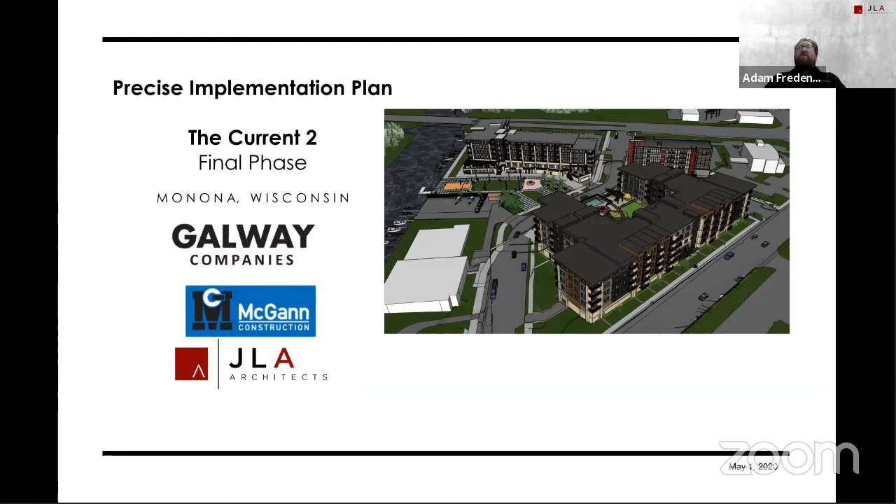Aaron and Steve are with us today, and they'll speak after I get through some of these exterior images. The last time we came before the Plan Commission for an informational presentation on January 27th, there was some general concern regarding the articulation of the Bridge Road elevation.

We feel considerable improvements were attained with proportional refinements, as well as the addition of 5 units on the first floor, or upper level parking. This is on the same level as the private parking level, which allows us to add fenestration and balconies where possible.

Some of the other changes from last time include the 2-story glass along with the vertical elevator, which is now expressed proud of the building front as opposed to having the spandrel materials cross in front of it. And we widened out these metal panel bays to get portions looking a little more comfortable. I think the material distribution on the front is now consistently applied throughout.

So the materials are similar to the Phase 1 project. The dark metal panel is from Millennium Forms in Elkhorn, the Summit Brick is St. Charles, sort of cream city color. The Monterey taupe panel would be the flat panels on the building, which have those reveal joints similar to Phase 1. The dark gray and the wood tone would be lap siding applications, and the wood tone is also on the soffit, similar to Phase 1.

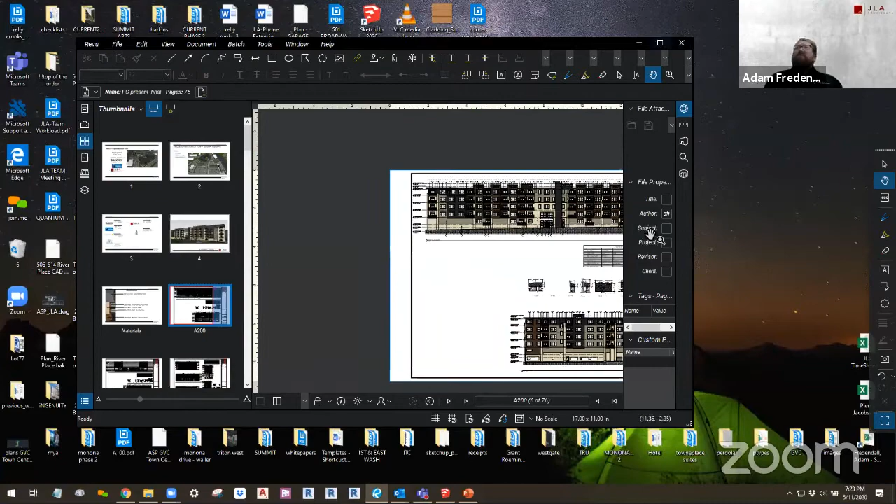Let's zoom in a little bit here, bear with me for a second. So on the buildings, you can see we've got lap siding for the wood tone and the dark gray, that's the Monterey taupe, and of course the brick piers that come up. The brick is now at the wainscot height of the second level parking, allowing materials to transition a little more seamlessly. Back to that over here.

Here you have the Bridge Road elevation and the north side elevation, and you can see some of these openings on the lowest level are just wall openings. The lower level parking would not be heated and would be free to access for public parking.

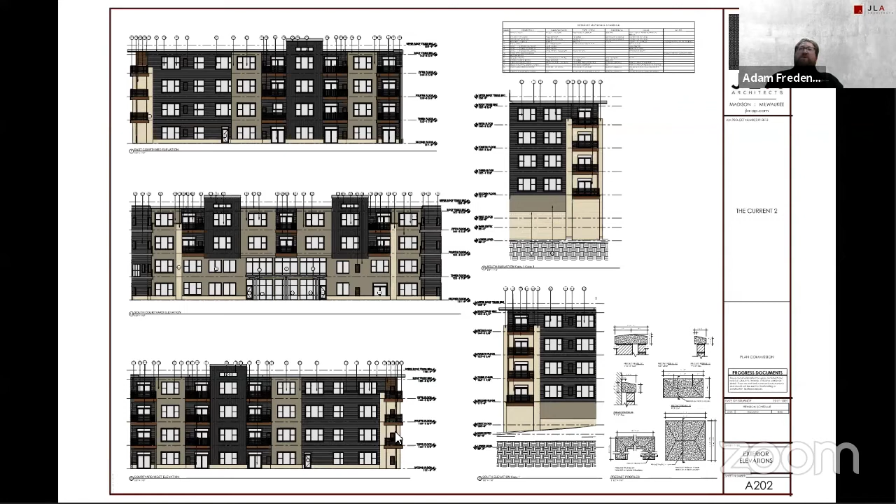Here you have the park side elevation as well as the south, and the miscellaneous ones in between. This is where the club room is on the courtyard, side courtyard wall. Got brick coming up to a wainscot height there, and then on the corners.

Jumping into some of these perspectives, now a lot of these images a lot of you have seen before. I realize there's some new people, but one of the organizing concepts for this master plan a few years back

was to really set up the importance of Grand Crossing Park, really create a backdrop for a fantastic public space for Monona. One of those things that really helped reinforce that is having the green roof of this multifamily building be on axis with the park, albeit a hockey stick type axis, but it really offers some dramatic connections that are multi-leveled and makes for a very dynamic space as you move through Inland Way and the Grand Crossing Park.

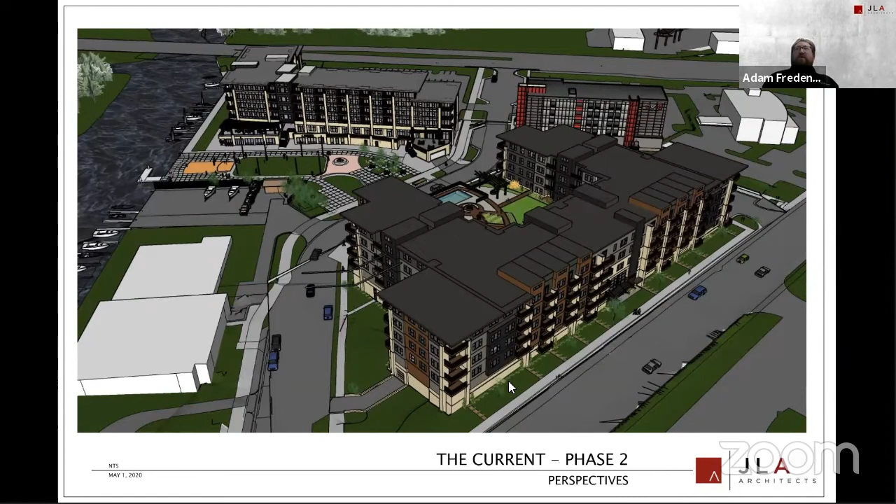This shot is outside of the club room on phase 1, looking over where the ice rink was and up to that green roof. So front and center on the building, this of course is the pool right behind here.

This isn't finalized by any means yet. The concept is to have something artistic there to really create a nice looking wall facing the park. So these things could be backlit and have a really nice effect. I think there's going to be a lot of discussion that happens still on what exactly that ends up being.

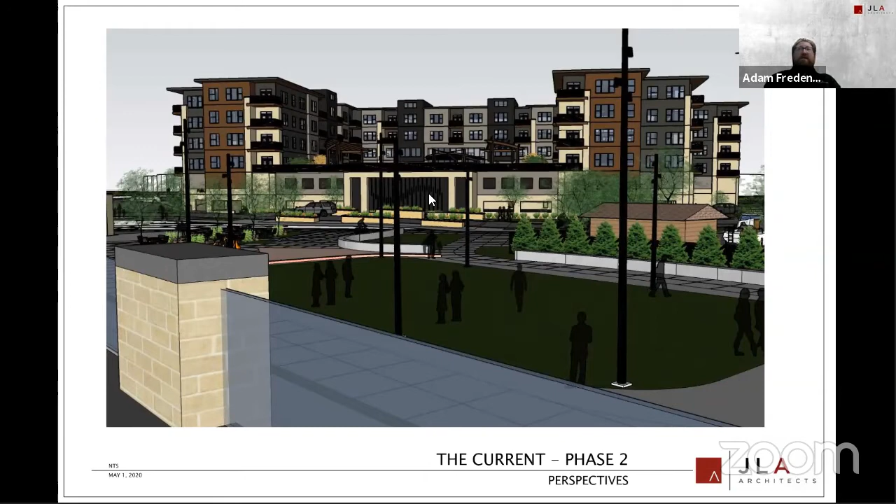This is just from the top of the stairs outside of True and Forage. Yeah, I know the railings look really dark in the renderings. They would be the same cable railings that we have in this phase, so they do become a lot more transparent in real life.

This would be a look as you turn onto Inland Way from Broadway, and then coming up the street behind Monona Bank, in between building and heading down towards the park.

The shot a little further back of Bridge Road. You can kind of see the material transition and coming around the building with the different colors and textures.

This would be on the north side of the building, coming up in the way across from the yacht club. This entrance here is for refuse collection. We really wanted to improve that situation from phase one, so it was critical that we get this right with how the service providers want to access and collect from the building.

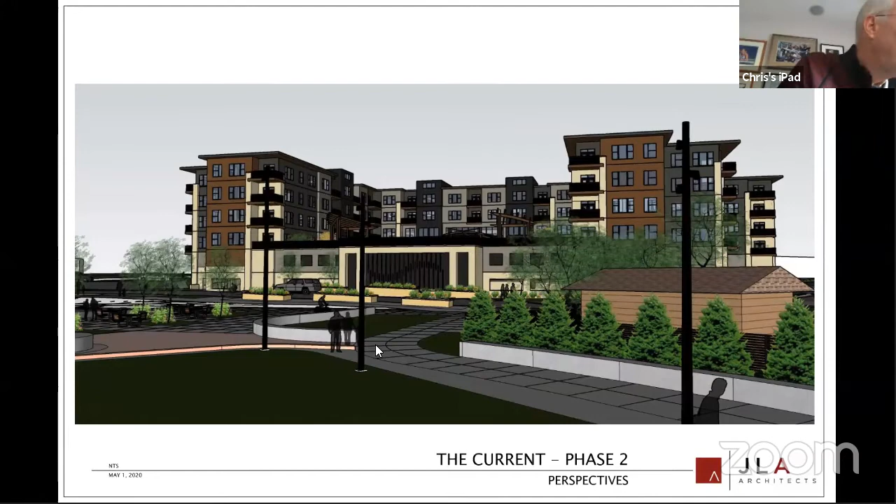Another shot from the park. And of course, from another aerial perspective, you can see the building is pretty maxed out on this site.

If you guys recall, the site was a little bit bigger before. Additional street parking was designed in around the periphery. We squeezed the site down a little bit, but everything seems to work out well.

One more shot, seeing the pool up a little closer.

And of course, the metal panel form on here likely has some signage on it. We're pulling some of the, potentially some of the wood structures through this project at select locations as well.

And the shot looking out from a balcony, probably 4th floor, over the park into the river.

So landscaping wise, like I said, the green roof is very generous. It's a nice large space, but we did still want to have grass area for people to hang out, play, and just a great space like a yard that wouldn't otherwise be available.

So heavier landscaping around the perimeter to give some sense of privacy to the people that have walkouts right onto that roof surface. We've got some central mulch and flowers, landscaping in the middle around the intersections of some walking paths. So these are just different paving patterns.

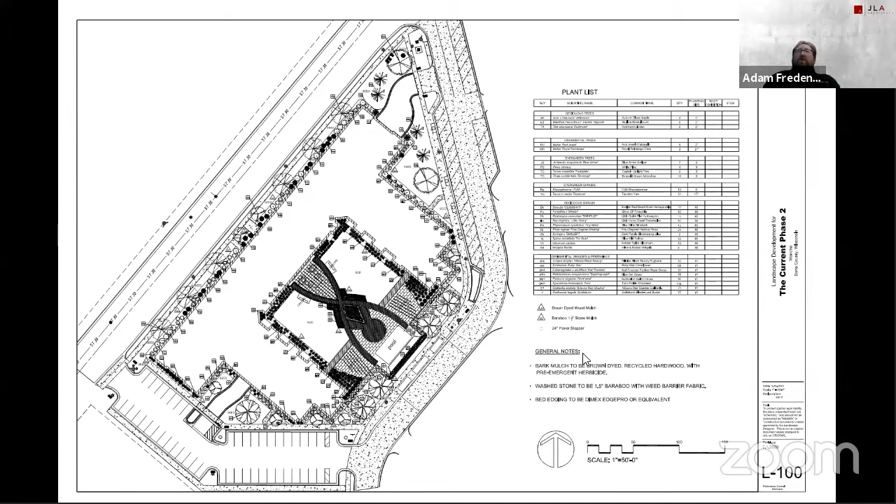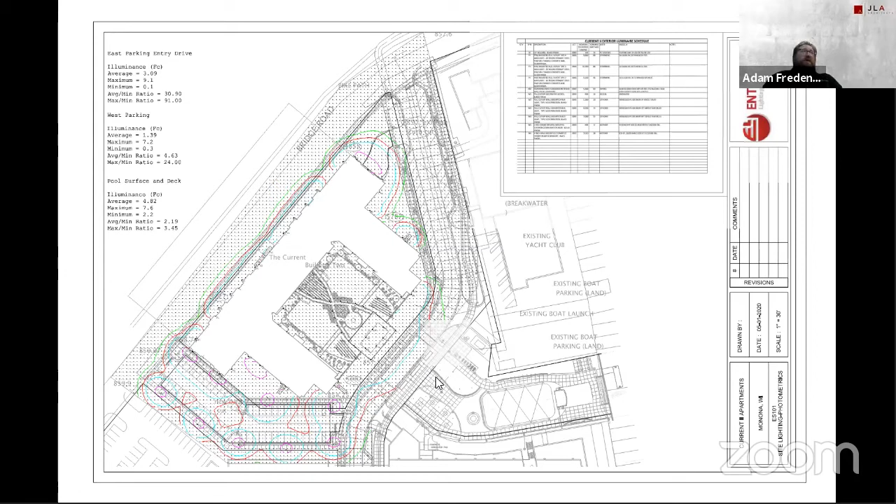We've talked to the next few items. Steve? What's that? Okay. Adam, can you actually go back to, I think it's slide 4?

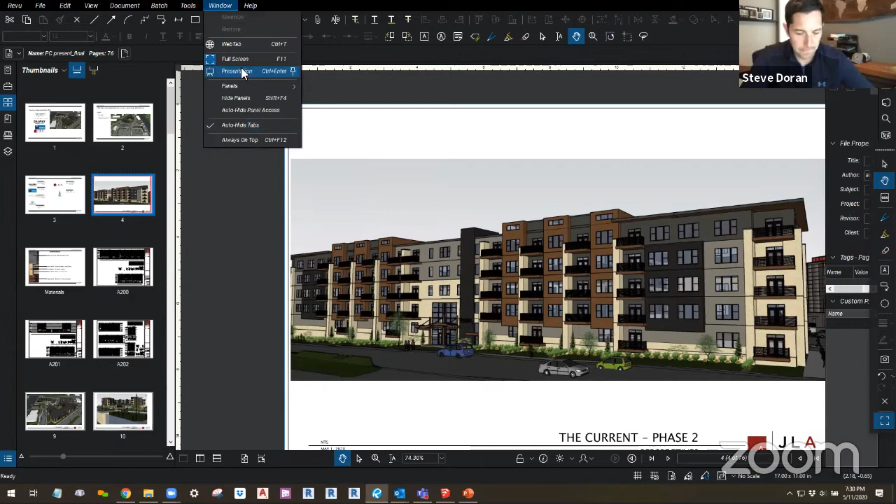I just wanted to talk a little bit about the Bridge Road elevation, something we've discussed a lot internally. This is one of many iterations we looked at. As some of you may know, we submitted for Plan Commission and planned to come a couple weeks ago, and we just couldn't get comfortable with what we had proposed on Bridge Road.

We've been trying very hard to be cognizant about bringing the Bridge Road elevation down to a manageable level so the building doesn't feel too massive along Bridge Road, even though it is a very big building. So one of the things we explored pretty extensively was bringing 5 walk-up units in along Bridge Road. Actually the plan set we submitted a couple weeks ago had those.

The issue we ran into is that the first floor of the building isn't level with the sidewalk. So in order to bring walkouts there, we would have had to bring a stairwell out that then shifted to the side, which essentially made it look like more of a wall. The stairwell out of the unit wouldn't come straight out to the sidewalk like a traditional walk-up townhouse feel, because there's a utility easement there that would prevent us from doing so.

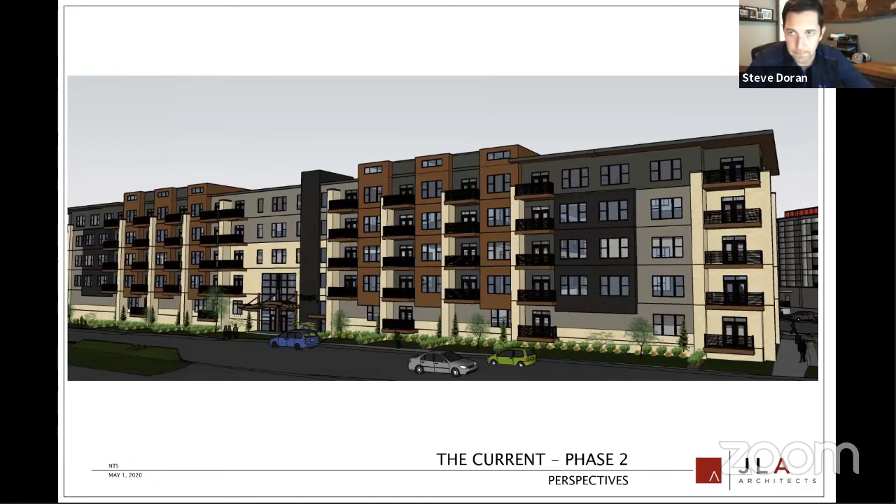So we were pretty disappointed about that. We wanted to do walk-ups there, but we were able to come up with this option, which I think is still really good, and it brings that first floor level down to a more feasible option. Those are actually 5 units you enter from the top private parking garage — there's no internal corridor. You enter into those units through a vestibule, and they're smaller one-bedroom units with more of an individual feeling. So I just wanted to talk about Bridge Road.

I know it was definitely a point of contention at the last Plan Commission meeting, and there was interest from all Plan Commission members to bring down the scale of this. So we've tried to work very hard on that.

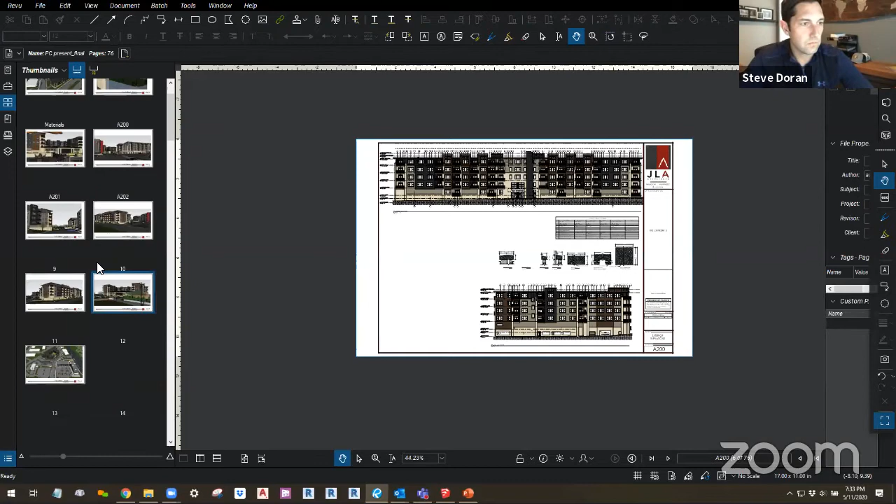Is that okay? Yeah, so a couple other things — one thing before I even get to this point, I'm reading, or we read in some of the staff comments today about the parking, and I just want to touch on that because it relates to our agreement with CDA.

We are currently showing 283 parking stalls. I think the plan set had a misprint and said 284, but the project is currently showing 283 stalls.

As the project is proposed right now, we would need 227 stalls, which leaves 56 stalls for the public. Now, in our agreement with CDA, we have to provide 58 stalls. So I guess what we're looking for tonight is approval to maybe work with staff on that. We will provide the 58 public stalls in addition to what our project is required to have per code.

That may involve us removing a unit or two from our project to make sure we meet code, plus provide 58 stalls designated for the CDA, per our agreement with them. We have a little bit of flexibility in our plan set to maybe add a stall or two, so we may not have to remove 2 units, but as of right now it's looking like we may have to remove 1 unit, potentially 2 for sure. It's our intention to meet that commitment with CDA and provide at least 58 stalls above what our project is required to have per code.

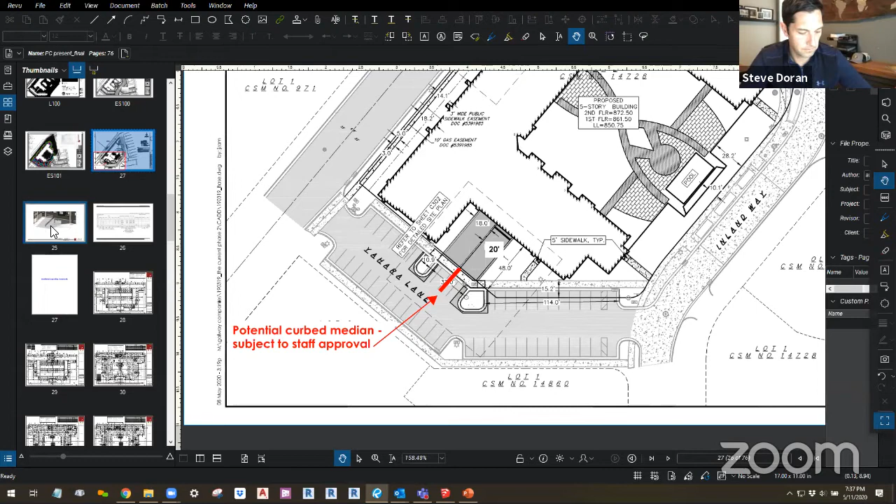I think the last thing I had before we open it up for comments, this is what Adam put together to show what it looked like off Yahara Lane.

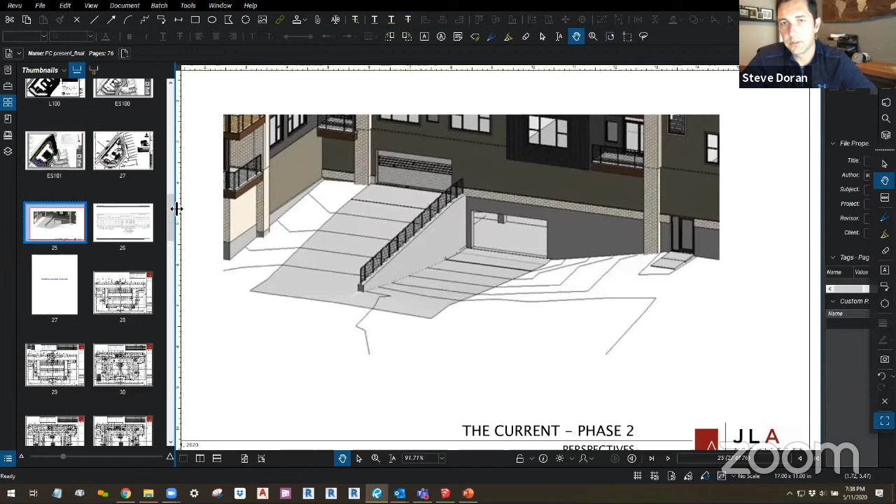The last comment I had is, I know we certainly did solar on our phase 1 project. We've got a study coming up right now to determine what that first year looked like, and we're exploring it for this project. We are going to make the building solar ready, but have not committed to actually putting the panels on until we see what the results are from at least one solid year of operating history in phase 1.

So I think that's all I had. I'm sure there'll be several questions, and we're happy to and excited to answer them.

Okay, but otherwise, Aaron, is there anything you want to add? No, I think you guys covered pretty much everything that I was kind of thinking about touching on.

We've vetted these entries into the building at every which angle and every grade possible, and I think where we're at now is probably the most efficient way to accomplish both things. But there's still plenty to work through as far as details with that entry and exit. We understand that, and we'll continue to work for something that works at that location.

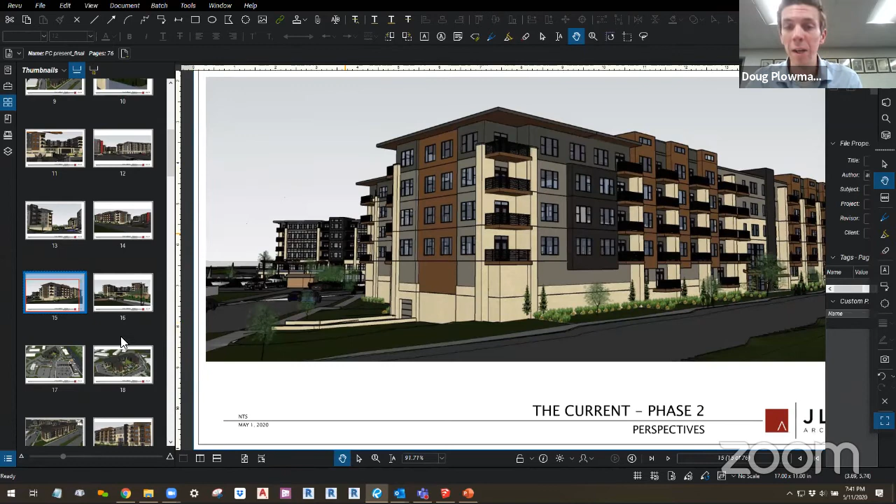In terms of the architecture, I think calling out the two corners there, sort of at Bridge Road, both Yahara Lane and Inland Way, there are still, and I think this builds on the discussion from the January meeting, still some blank wall space there. I don't know in terms of the renderings and how the landscaping plays with that, but on the perspective views, it did still seem to be there and worth calling out.

I was encouraged to hear from Adam tonight about the screening wall covering the pool equipment. I know there was discussion about that at the January meeting, but some more discussion and design concepts for that would be good.

The site design in terms of lot coverage, I think it's important to call out those numbers - the percentage at grade, given the site constraints and massing of the building, comes up to about 11,500 square feet, around 13%. But adding in the green roof takes it to 35%, which is over the 30% requirement for code.

I'd be interested to hear more about the green roof specifically and the design for those, and encouraged to hear about the solar as well, the solar ready.

The applicant gave some more information about the setbacks and specifically the walk-up units, the easements there and the challenges that brings. I think it addressed in some ways the visual along Bridge Road that was the feedback from the January meeting, looking to get a little bit more interaction at street level, particularly for pedestrians.

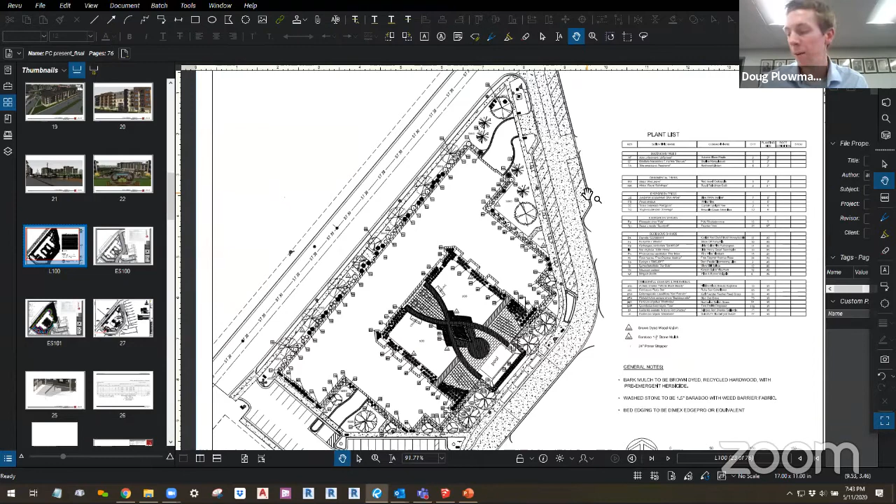Moving through vehicle access, the parking, most of that has been laid out. We have Chair Stolper here from the CDA for that portion, but the applicant outlined the 58 public stalls. You also see discussion in the review letter from Strand about the parking and a couple spaces being taken out on Yahara Lane - just to think about that as well.

The pedestrian and bike access - I think it was 158 bike stalls, with 3 different interior bike parking space areas. Speaking with Adam, he mentioned there's also a plan to put as many racks as possible at grade, on the exterior of the building, both for the park side - it may well be both public and residents using it - same as phase 1, as many bike parking at grade as possible. That seems to be the plan.

Lighting was outlined pretty well by Strand - some comments about continuity with the rest of the master plan, making sure the materials and product are similar, and a couple things to figure out about private versus public location of those lights, and maybe a bit of light trespass as well.

Signage - this was brought up again in the January meeting about really delineating the access and ramps, making sure the public and private ramps are specifically called out, so the public knows firstly where to enter with their vehicle, but also the right doors and access to return to the vehicle, maybe after having been at the park. Making sure that's clear, and having some unified signage would be a good recommendation.

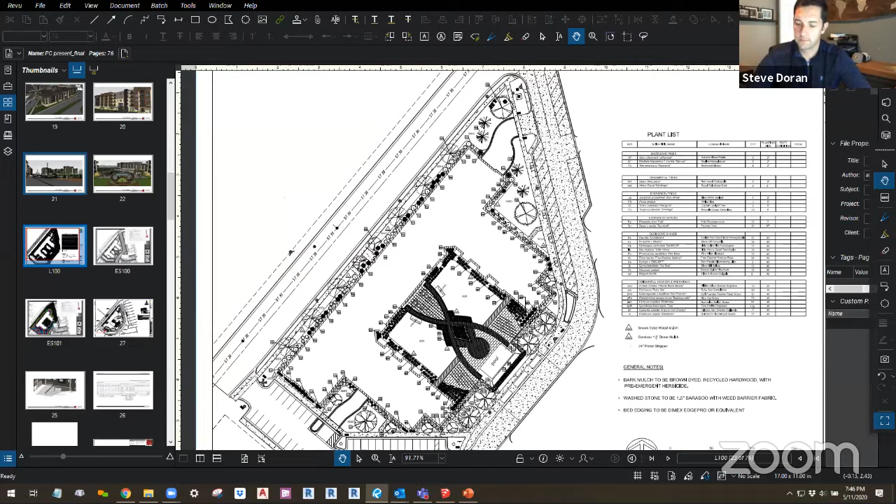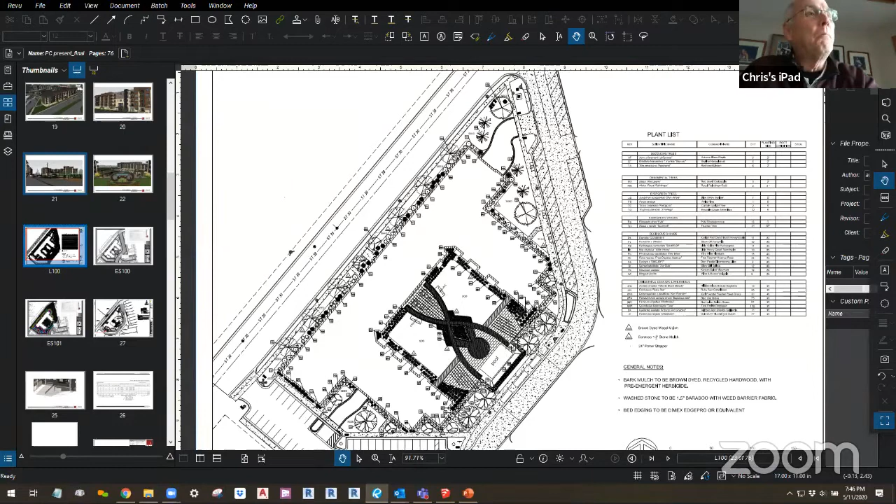Okay, I'm not going to be able to see the people, am I? First thing I'd like to say is I love what you've done with the Bridge Road facade. What was before very monotone is really interesting now. I love having that 2-story glass entrance, and I like having some units on Bridge Road facing there - there'll be a little human element. I think you've done a great job on Bridge Road. It's still, as you said Steve, a massive building, and it is, but you've really created a much better facade, and I'm very happy with Bridge Road.

I understand, Doug, about landscaping, and they do - when we look at the landscape plan, they've got a couple trees on that corner.

But I think you've really solved the biggest issue I had with the entire plan set.

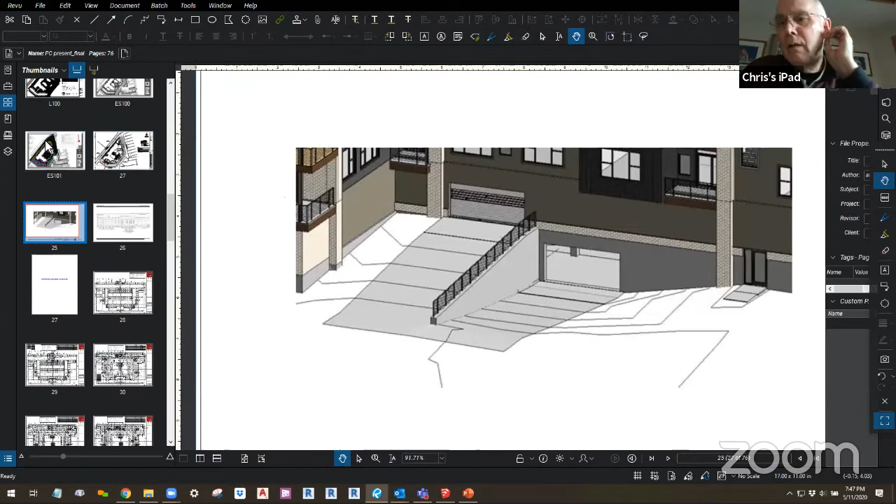I do have a question for the underground parking coming in the south. Would that be the southwest corner of the building, the south entrance? Thank you. That's going to be twice as wide now with your proposed change, right? You'll have 2 lanes in and out of your private area, plus 2 lanes in and out of the public area, correct? Right, that'll be 2 20-foot wide entrances. So we'll lose a few more stalls in there. Correct, just something we'll have to look at in the final tally.

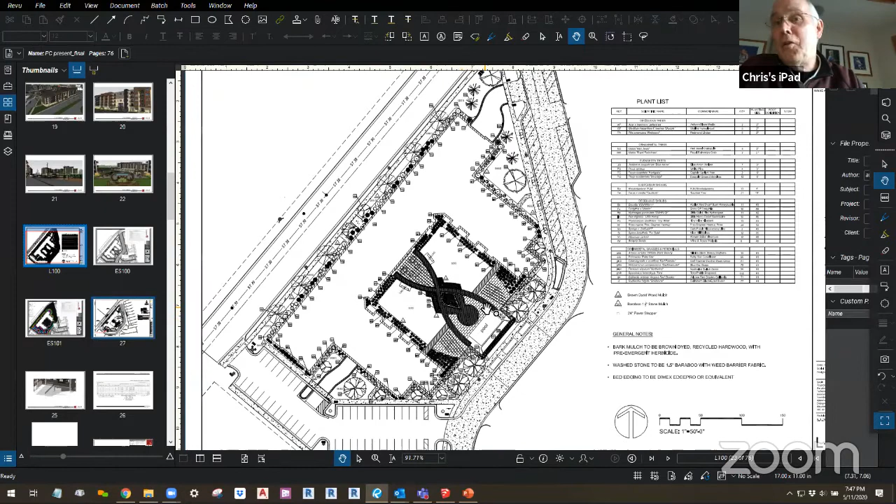On the landscaping, we generally have this issue with underground parking, where sometimes there isn't enough room. I think this is one of the first times in Monona I can remember we have 2 levels of underground parking, and I think you've put a lot of landscaping in there. I'm pretty happy with it. When you have 2 layers of underground parking with so little green space, it's hard to get the points required, but I think you've done a pretty good job of putting what you can in there without overdoing it. So for me, I'm very happy with the landscape. I wish Rob were here to comment on it, because my eyes are pretty old for looking at all those tables on the size plans we have. But overall, for the points and the saturation, I like the landscape. I like the way it's turned out.

I have, if I could switch gears, a number of questions that will go to you, Josh. You're on here, yes? Yep. Okay, so let me go through your engineering report first.

Item 3, we talk about the permeable pavement areas, and the applicant's going to be going through those. I believe the city's intent is to put permeable back in where we don't have drive lanes. Obviously, where they're putting in their driveway, we would leave regular asphalt there. But it's really critical for the applicant and their site contractor to be aware of what's below there. There's open graded base course and drain tile, and if they were to get into that and contaminate it, it would contaminate that entire bed on that side. You know, Josh, what I'm talking about. Yes. So, somehow remember that when they have their pre-construction meeting with the site contractor, you can really address that area. I'm not sure if they're even proposing on replacing that asphalt that's there.

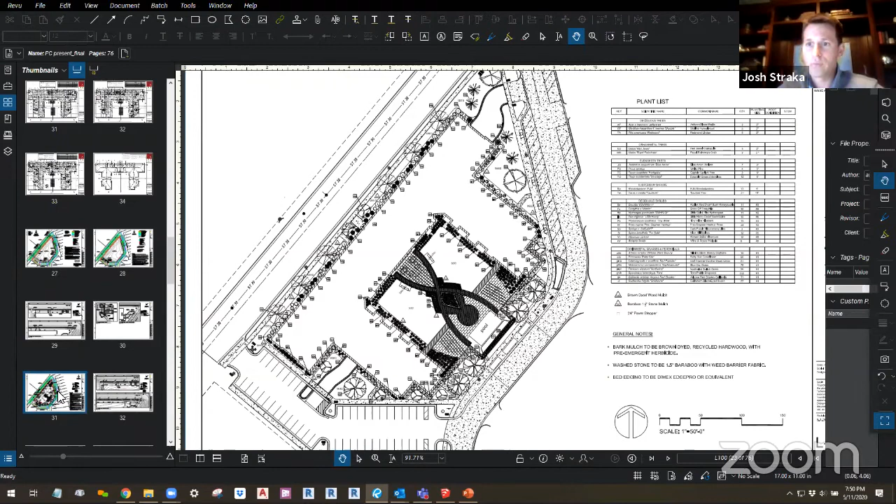And then one of your comments was not to saw the curb head off. Can I ask why, and replace the curb instead? It's just, if it's new construction, and they're tearing all that sidewalk out and putting a new ramp in there, we just thought it'd all be clean. I agree with all that, except that this is right over the permeable bed, and it was all poured integral. If they saw the head off, that will probably react with the rest of the curb better than completely removing it and putting a new piece in.

And so if they're not going to change the grade on that asphalt, we have no patches on that asphalt right there either. We've got a good tight edge that we already have, because I doubt we'd replace the driveway with permeable. I would hope we wouldn't. We'd leave that regular asphalt.

So all I'm saying is to keep that open for an option. If they saw that head and the grades will work, I agree with the sidewalk. They've got to take the sidewalk down and back, and I think you illustrated how far they need to do it. But that still keeps them out of our pavement, and I think every little bit we can keep them out of our pavement, that's going to be better for us. And again, it'll save them a little money, so that might be a win-win. Makes sense.

One question on your item number 8 talks about the middle entrance to the development off of Inland Way, and that it may be too steep for ADA, but they have other entrances. Does every entrance have to be ADA accessible, or do they just have to have so many? Because we have a lot of grade issues here with the way this building's being sited. I think somebody really put their thinking cap on between our last meeting and this one, and they've come up with some great solutions.

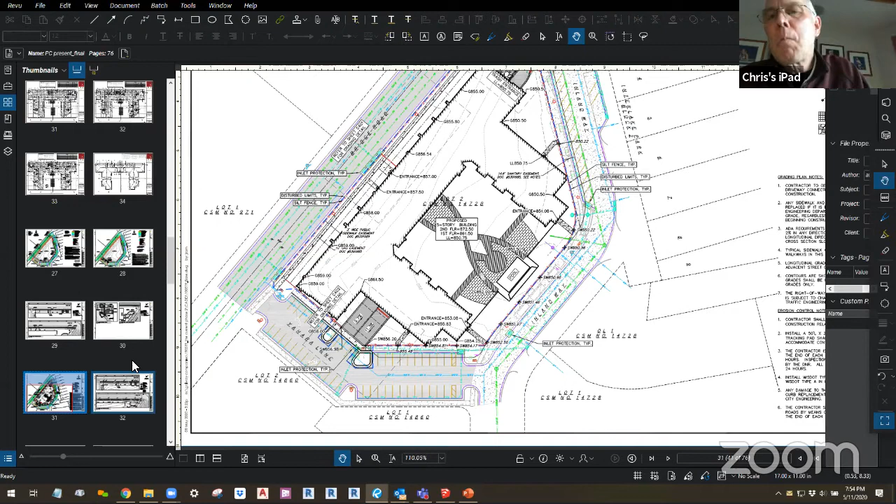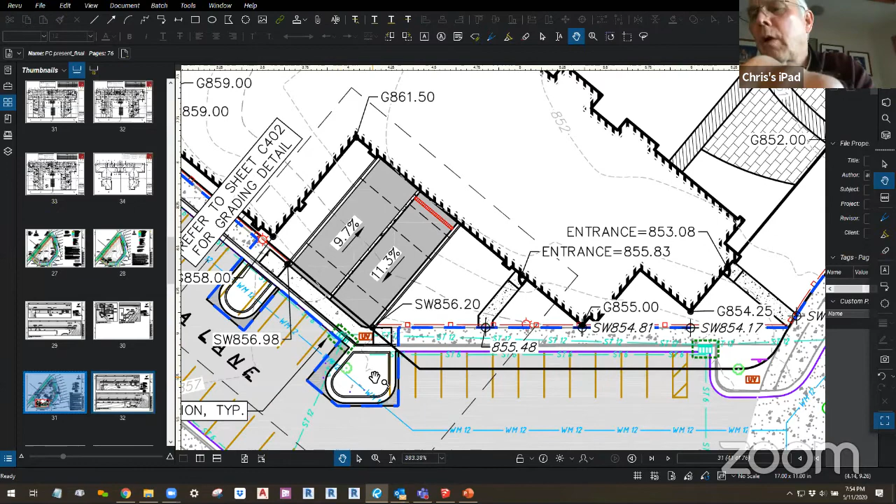Under utility items, I suspect this came from Brad or Dan, number 6 — they wanted a catch basin before the water from that southwest entrance comes over the sidewalk. The southwest entrance where it's now proposed with a double entrance — the stormwater report talks about it, we have an inlet right in the corner, right? You're talking about putting the inlet right behind the sidewalk to catch that water before it comes out. That, I believe, is how I read item number 6.

Yeah, it's in that same area, but now that's different with that driveway there, is it not? That's my comment, because that one half is actually going down, so you're not catching any water there. The one that's coming out is a fairly small area, and it has traffic on it. So I'm thinking to add another inlet for that small area might be — you're going to be tearing into the curb, tearing in the inlet — might be more harm than good.

It's such a small drainage area, and with the cars coming in and out over that sidewalk, the salt they carry in and out will keep that area clean. Do you really think we're going to be able to construct this, Chris, without disrupting all that base under there and everything that you guys did? I just don't believe that's true.

If they don't change the grade from the curb out, I think they can. And I think you could cut in those 2 islands. If you're really careful, you could saw right on the edge of the flag and pour those in there, because they're just to delineate traffic, and you're going to match grade. So if they're not changing grade there, now if they come back to us and say they need to change grade coming out towards Yahara Lane, then they can.

So, and all I'm just bringing up points, and I'll probably ask the applicant just to make sure they've gone through all this and they're in agreement with everybody on what needs to happen there.

Does everybody, with this up here now, Chris, and you can see this entrance, just because we have it up here now, does everybody feel comfortable with how tight that's going to be getting in and out of there? Don't you think we're going to have to remove some of those islands even more?

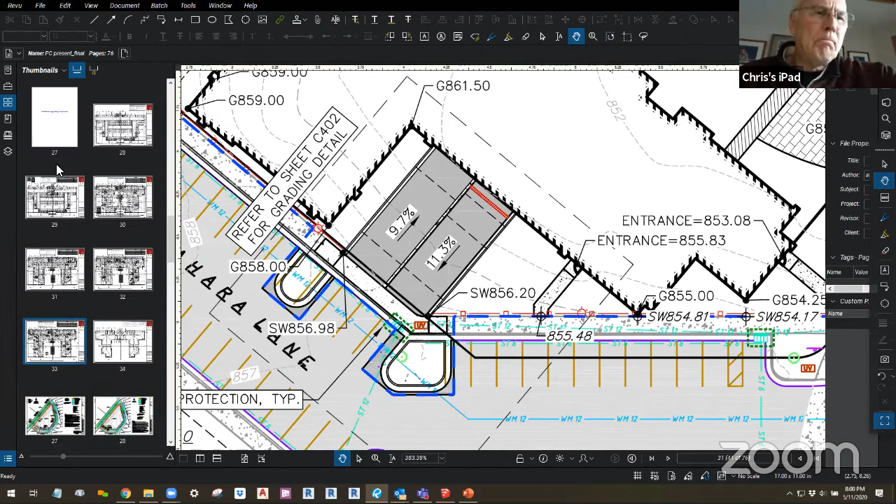Was the lighting that we saw on the plan going to be what was proposed, or was it supposed to be the style? Like Doug, you mentioned, we pointed out as far as the bollards and the lights and everything, it's kind of a different style than the first phase. Steve and Aaron, was that done on purpose, or what's the thought on that? I thought when we first decided and talked about all this, we were really trying to coordinate the road and phase 1 and the park all together. And then this building has something a little bit different.

Yeah, I think that might just be an oversight at this point, because I really do think our intention was always to have everything between phase 1, the park, the hotel, and here be integrated with similar fixtures. Okay, Adam, is that correct? I don't know if that's correct. I think that some of the images of those fixtures show it generically. There's colors available to match, but stylistically, the instruction was to get as close to, if not the same thing, as we used on phase 1.

I believe there was something about one of the fixtures potentially being discontinued and being from a different manufacturer. So I think the goal would be for them to match as close as possible, if not be the same thing as phase 1. Thanks, Josh, that was my last question.

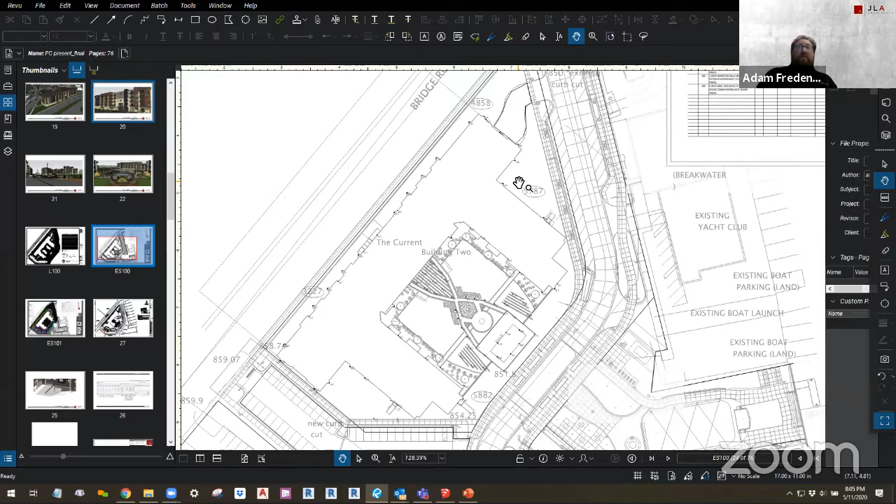Okay, but would that be true with the EMS as well? Correct. Okay.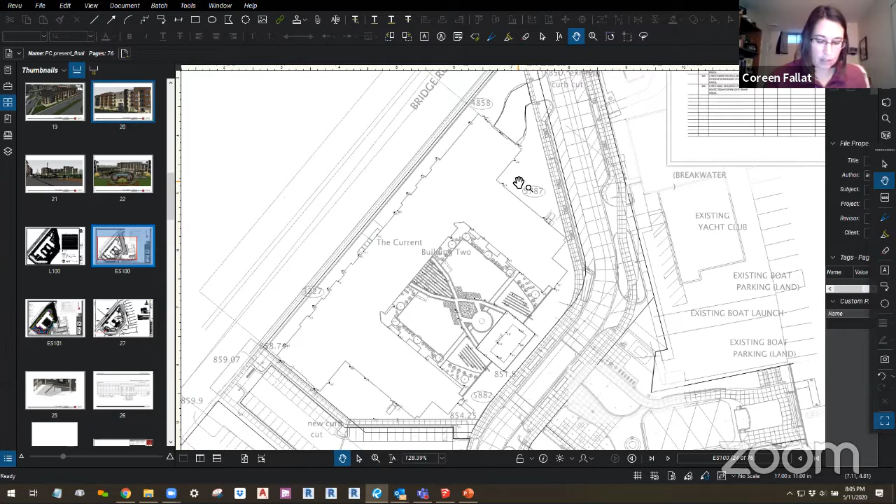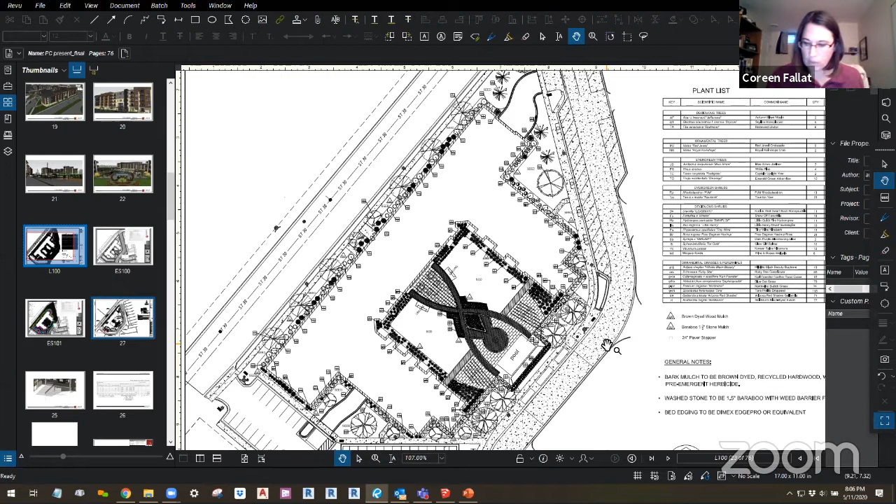And then I guess I had questions about the landscaping, but I understand the issue with how tight the site is. So maybe just the point Doug had made about that corner that was kind of bare, considering whether there's an option to do some additional landscaping there. But the perennial mix shown on this plan, I think it's going to look really beautiful, really nice. So other than that, I think you've addressed a lot of my questions.

Great, thank you, Coreen. Josh?

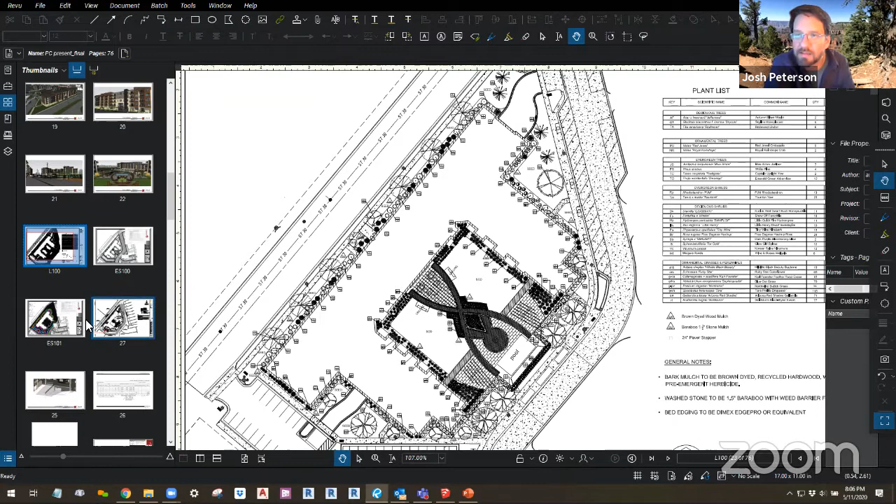Thanks, Nancy. Most of my questions have been answered, but I want to come back to that corner, southeast corner I believe. You mentioned you added 5 lower level units, and I noticed there's an opportunity to add a 6th to even that out, though there's substantial grade change along the Bridge Road elevation. Any reason why you didn't carry a 6th unit over to that far end? We're too tight on parking. We'd love to, we're just too tight. Got it.

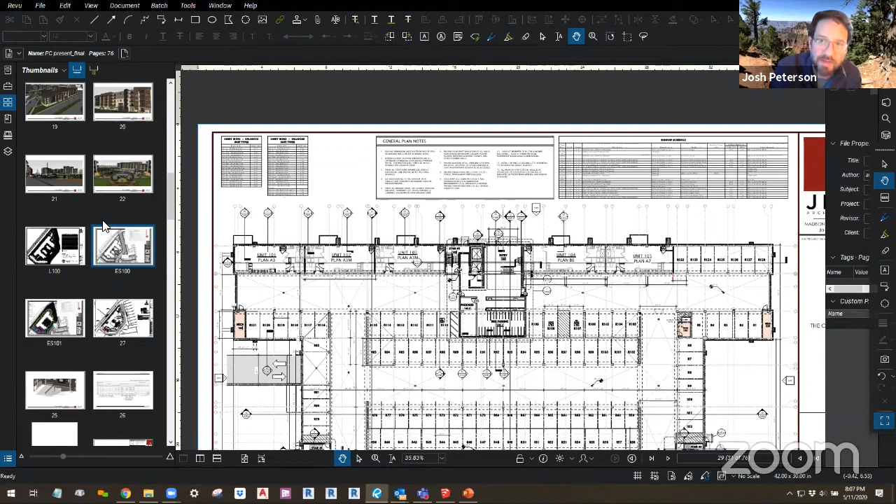Another question: you have that beautiful green roof highlighted above the deck. I'm curious, was there any consideration about opening up access to that, a stairwell or anything of that nature? Right now it looks like the only access is from within the building. Is that true? Yeah, that is true, and we talked about that extensively—potentially even a stairwell down to the park, so if residents are at the park they could walk up to that green roof. But I think the benefits are outweighed by the risks in terms of security, especially with the addition of the pool and non-residents being able to get up to that area. There's just too many security risks with allowing the public up there.

Sure. Okay, and then the last comment I had is just access to the parking, public parking section. Obviously that's shifted from what was submitted and reviewed by Strand, at least when I look at the renderings, so I'd like to get into the site plan a little closer. But I've frequented the first phase of the current development—parking's been a real challenge, and I'm a relatively new resident to Monona. I worry about the intuitiveness of accessing that public parking based on where you've moved the entrance into it, and I'm also worried about both entering and exiting that ramp. It looks like a pretty significant elevation shift, coming hot out of that ramp right into the parking area. I worry a little about it, so I'm curious why that's changed, why the approach has changed.

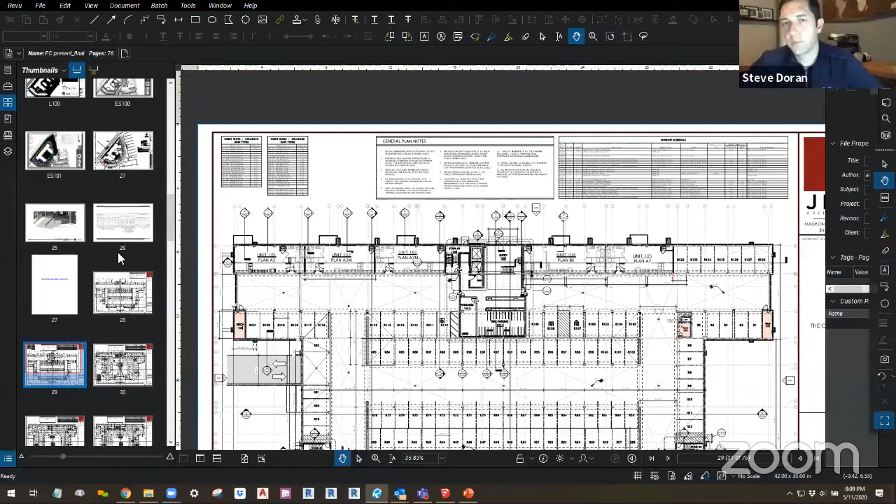Well, so before we had the entrance—a couple things. One, we're certainly open to conversation on this if the Plan Commission has a strong feeling about it, but we had the entrance kind of on the southeast corner right there. Adam, can you pull up the site plan, please? Yep.

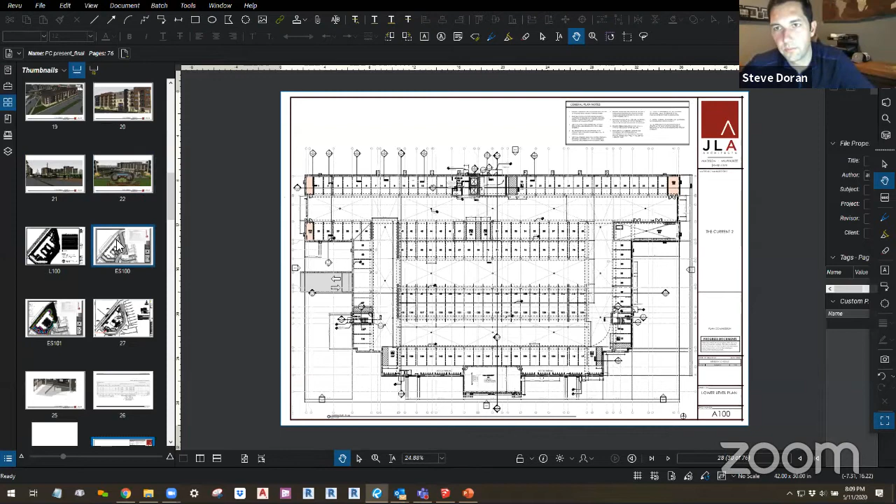Actually, maybe even the 3D aerial would be a little bit more intuitive, showing that southeast corner of the building. Yeah, that'd be great.

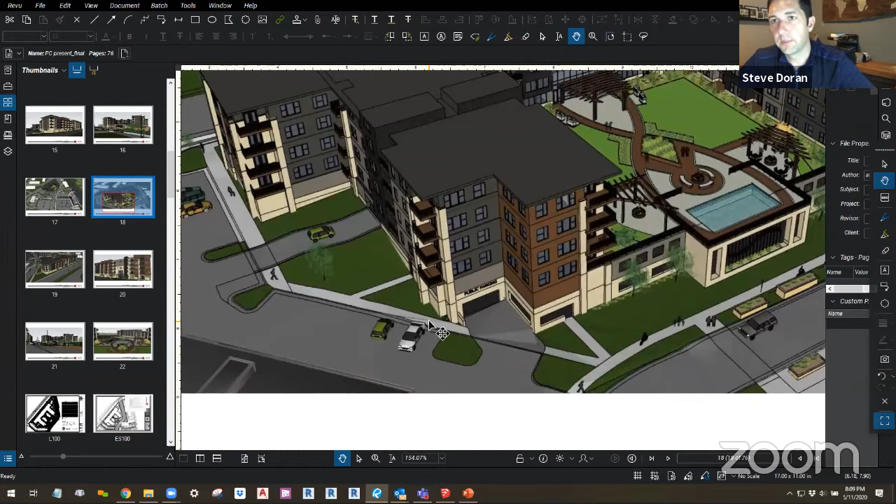So our goal here was to originally put the public parking entrance right there, as you can see. That's how we had submitted the project to Plan Commission. It's intuitive, it faces the park. The goal is to make it so that citizens of Monona coming to visit Grand Crossing Park have a place to park. If Parks and Rec is having a series of events there, or there's a big group of people coming in for ice skating, we want them to be able to find that.

It's just that it feels super close to the interconnection there, between the hotel and phase 2, and the grade change from that connector road down into the public parking area would be really steep. Is it something that was addressed in the pre-hearing? If so, I apologize. No, it wasn't.

So that's why we shifted it to make it next to the ramp that enters the private parking garage, because it just gives us a little bit more length to enter the garage area. It's certainly not closer to the park in terms of being able to see it from the park, but we will work closely with staff to sign it as parking available for the park, and we'll include some wayfinding so folks can find it.

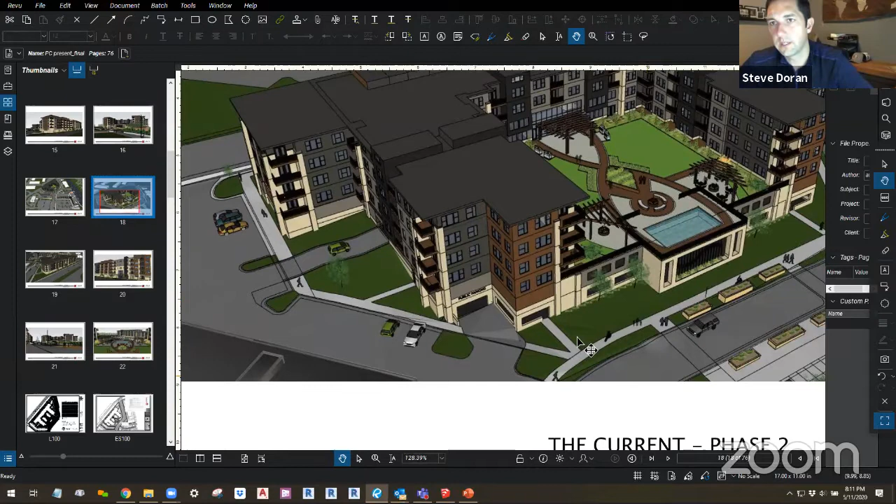In the other comment, I think you can see on that lower level parking area, there are walkways directly into that lower level parking area. So I think ultimately, while you may not be able to see it from the park, once you're inside and you're parked, you're under shelter until you walk out that front area directly to the park.

Steve, this is Chris. Could I ask how really steep is? Adam, what was that grade? Was that grade like 12% or 13%?

It's not just the steepness of transitioning from A to B. It's because we've got to go around a bend like that, and from the back of sidewalk down, if there's not enough length to make the turn, you'd have to continue sloping under the building and also make an immediate right when you first go in the door. So it wasn't a safe condition for people traversing the entrance.

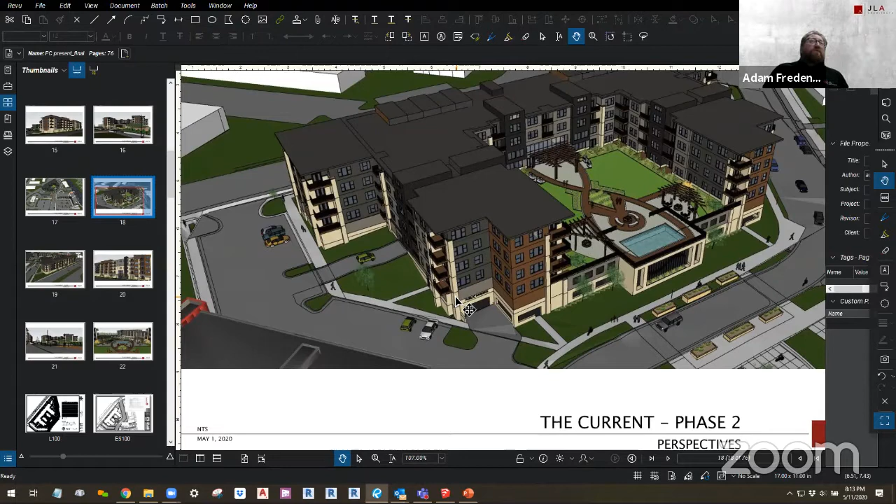Slope-wise, it just wouldn't have worked because we would have had the sidewalk meeting the drive on one side higher than the other. We potentially looked at jogging the sidewalk out, where those grassed areas between parking stalls are, but ultimately we have a 6-inch... a 12-inch storm sewer down there. We've got an electrical box right there as well. Adjusting the grade where the sidewalk naturally wants to be wouldn't have been possible without a lot of rework, and we still would have had the safety issues entering the building.

Okay, so the slope would have been similar. That's about 12% going down on your other version too. So it would've been a similar slope. Right. And that really accounts for starting that slope at the drive and not at the back of sidewalk, because that's really the only way you can get down steep enough. So your 12% was starting at the main drive aisle on the other side of the sidewalk. Yeah. The sidewalk would have been relocated out, and then you've got the utility issues.

Correct. And then you still got... because I agree with John, I like that entrance, but we could do some nice signage where that sidewalk comes in to public access, could we not? That'd be a question for Steve or Aaron, where I'm pointing on my screen, and I'm pretty sure nobody can see it. Yeah, no, we certainly think we should be having some signage there, on that corner where that sidewalk comes in. Right. Yep. Yeah, absolutely. Yeah, I mean, I'm with you, Chris.

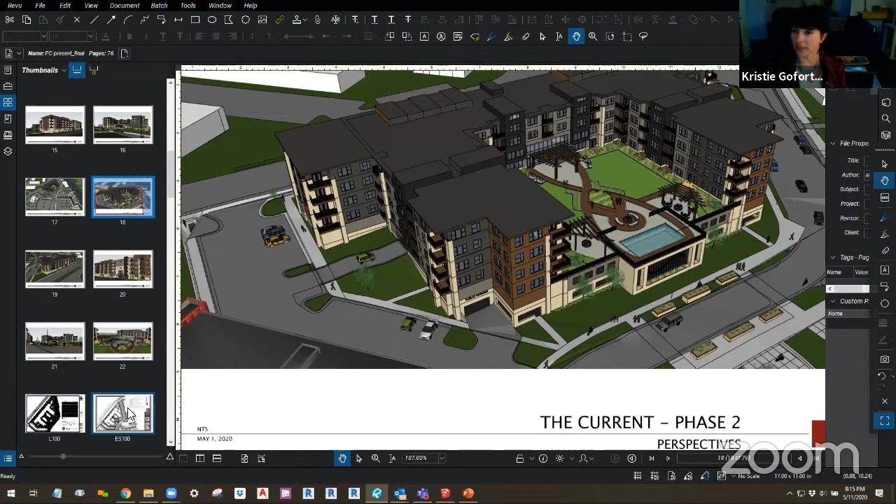I think the parking ramps at the entrance look like an 11.7% grade and then like a 9% grade. Are you planning on having those heated, or what's the plan for de-icing?

Water Tower Place has a ramp like that, and it is treacherous in the winter. You think people aren't going to walk on them and need to, but they do, and I can't tell you how many people I saw wipe out. Then I think about needing a lot of salt on that, and all that salt running right into the river. Is there a possibility of doing some underground heating element there? I'm also thinking about the EMS building and EMS personnel, if they can't get in there and have to run up and down those ramps, seems like it's potentially something that could be considered.

It's funny you talk about heated driveways in Wisconsin, it's a toss-up of what's more socially and environmentally responsible. Do you heat that and waste the energy, or do you use salt? There's a lot of areas in the country that have really good luck with heated driveways. If you look at Colorado, where it's cold, I think they have some success, but they don't get the extreme cold and bone-chilling humidity that we get here. I would worry that if we heated those, the amount of energy we'd spend trying to keep them up, and the boiler we'd need, would just be enormous.

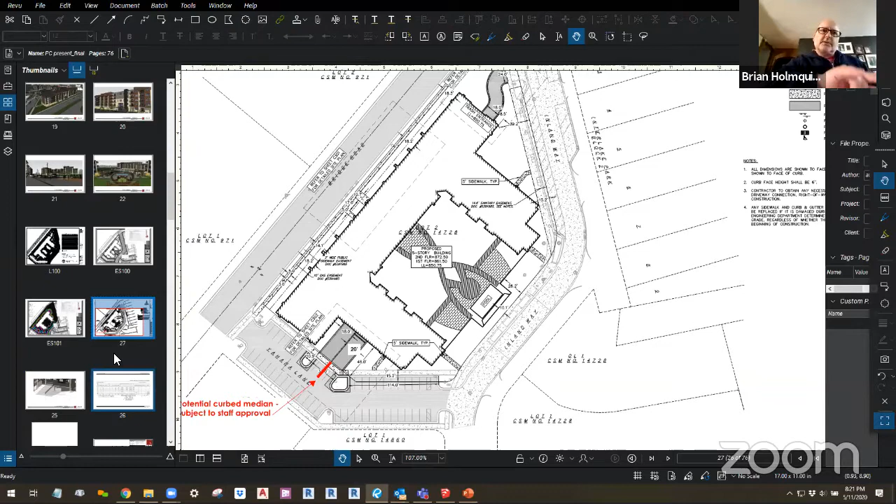Yes. And so will that be, what will that drive surface be? That'll probably be concrete. Okay. And now we get to signage, because we wouldn't want anybody trying to enter over there. I assume it would just be a closed door. Yeah, I can't find the rendering here, so that helps.

Other than that, all the other questions I think have already been addressed, and there's no need to rehash what we've already talked about. Okay, great. Susan Fox.

Unmute. Same thing, really. Any questions I had have been answered. I was really happy to see the design for Bridge Road. I think it looks great. I also favored the parking plan, the public parking access that's shown here, but from listening to the discussion, it seems like that's not a good option.

I just had a question about when people are moving in and out, is the only main elevator that one at the front entrance, or is that where moving trucks would pull up? Or, I mean, I'm assuming they're not going down into the parking ramp, so I'm just wondering where that happens.

Yeah, that's correct. Both elevators are in that section. There's this one section that's in the front, larger. So you've got one designated for move-ins, but they'd both be at that central hub there. Okay, that makes sense. The moving trucks would pull up on Bridge Road.

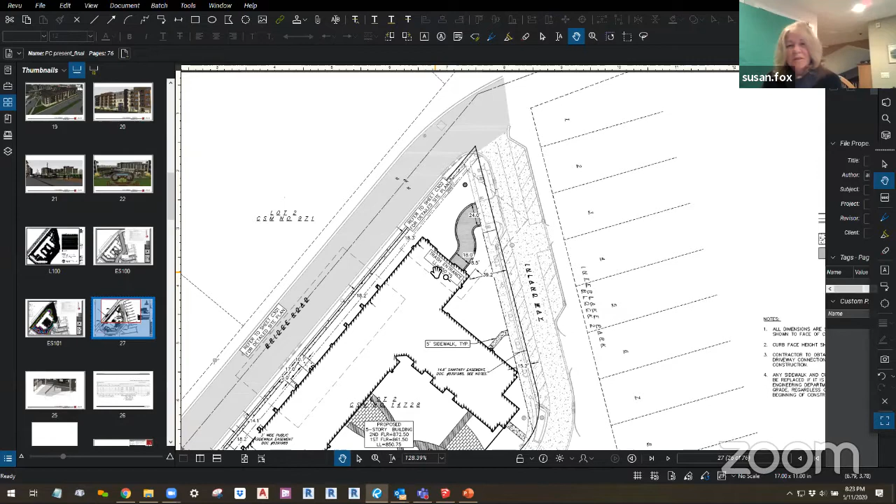Yeah, I think you've done a great job with the density in such a tight area. And the only other thing I thought is on the corner by where the trash driveway pulls in, the northwest corner, I guess - I don't recall whether there was a tree shown in the landscaping plan, but looking at the elevation pictures, it looks like that might be an area where you could do something like that. Somebody commented there was still a good amount of wall there, which there is, but it looks like you've got some things going on there that will mitigate against that.

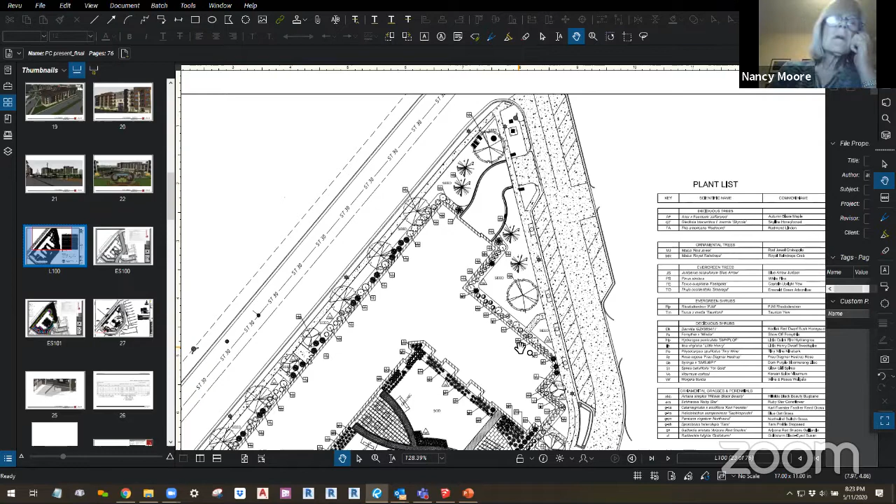So I think it looks great. No more questions. Great, thank you. I just had a couple of things. One is I just wanted to say kudos, as several people already have, about the additional massing you did, especially on Bridge Road and also on the side facing the park. I think the mass of the building overall is a lot better. I think you guys did a lot of work on that, and it shows.

I was kind of surprised because we talked quite a while about the articulation of the roof line and switching up the articulation of the roof line. And I went back and pulled all the perspectives from the last meeting, and it didn't look like the roof line actually changed at all. It just looked like you changed the bottom of the building and massing around the bottom, but we actually even talked about potentially letting go of a couple of units, like on each corner.

If I remember correctly, that was something Chris even talked about—the idea of potentially having some corner units go away so it wasn't all just one big flat mass. Instead we ended up with 5 more units rather than less. I know you said you might get rid of some units anyway because of parking requirements, but I'm wondering if there's a way to articulate the roof a little more, because it still is a big mass, and switching that up might help.

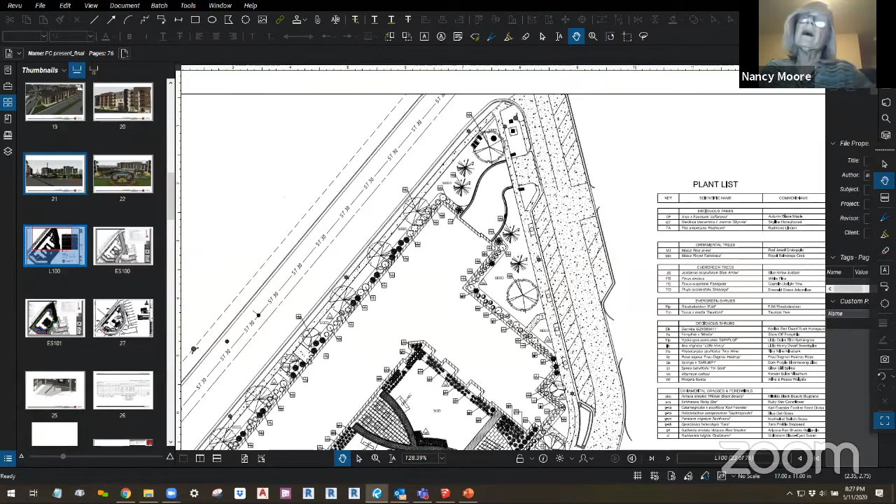And then the only other thing was the screen around the pool. Your drawing showed a fence of sorts around the pool, but it definitely was not lockable—I'm assuming that's going to be adjusted, because the fence in your drawings looked more like an aesthetic feature, and I think what our public safety people were looking for was a lockable safety feature. Correct, yes, it would be all the way around and lockable. Okay, great.

Let's see if there was anything else. I know there isn't an easy solution, but I share the concern other folks have about the parking in and out being in that same location with only one in-out, upper level and lower level. That seems like an awful lot of parking to just have. If we had an event at the park and that public area was full, it would take a long time to get 50 or 60 cars out of one ramp. So in terms of location, and that solo ramp for such a big parking garage, it's worrisome to me.

I'm wondering if there might be a way to have one of the other entrances be where the trash is, and put the trash over where that 40-foot or wider area is, so it isn't all congested in one place. I think it's going to be a challenge in terms of signage and entrance and exit for all those vehicles. But I know we've hashed it over—I just thought I'd share other people's concerns. Otherwise, I thank you for the work you've put into it, and I think it's going to be a great addition.

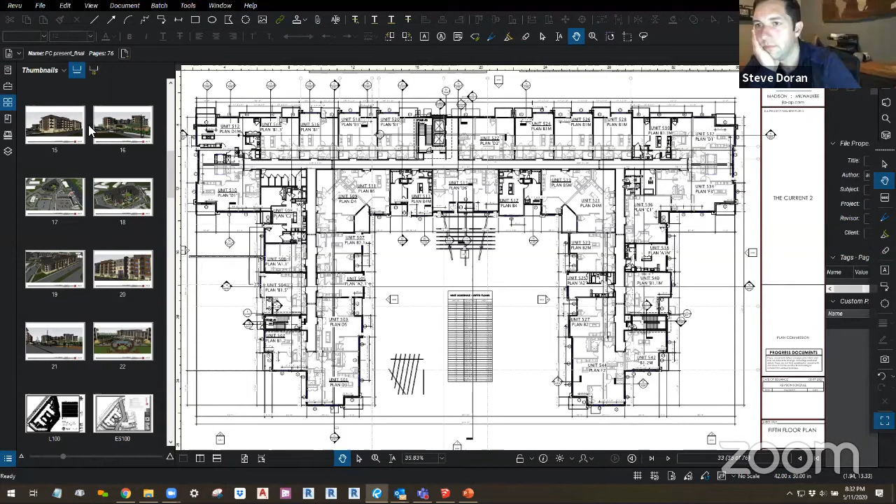This is Steve. Can I make one quick comment? As part of your motion, I'm thinking through and taking all your comments in. I can appreciate them on the parking garage entrance. Can we have a little bit of flexibility to continue working with staff on that public parking garage entrance? If somehow, some way we can make it work where it's currently shown, we will try our best, we just haven't been able to to this point. So we'd like to get approval the way we have it shown on this plan, but if we can get it back to where Adam has it on his 3D rendering, get Strand on board and our engineer on board with something that makes sense and staff approves it, maybe we could be extended that flexibility as part of any approval tonight.

I think that could be arranged. Thank you for offering that. And we didn't bring it up as well.

You mentioned, Steve, that you would meet or exceed the parking requirement. I think you said you're at 56 now, right? Yep, and you need to be at 58. So you agreed, while you're not showing 58 in the plan, that you'll come up with 58 minimum, right? Yep, we would meet enough parking. We will provide enough parking for our project per code, plus 58 stalls.

Right, got it. Do I have a motion? This is Chris. I'll move approval with the findings of fact as written by staff. Conditions 1 through 9 as written by staff. Modify condition 10 that final paving and repairs done to any city property shall be approved by staff. Conditions 11 through 14 as written. Condition 15, compliance with the engineering report and final approval on that by staff. Condition 16, that the revised public entrance final configuration shall be as approved by staff and discussed at the plan commission meeting, and if there are major changes, it will need to come back to plan commission.

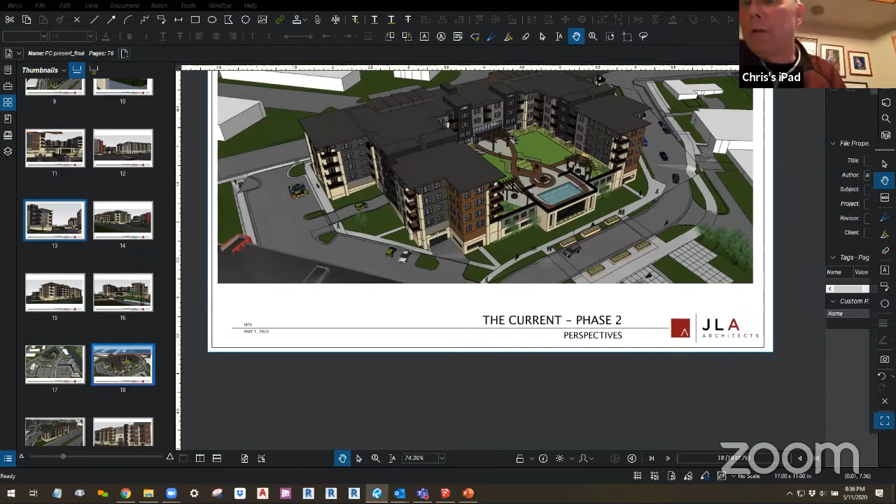Any other discussion? Condition 16 was worded that way because we've had quite a discussion on it tonight. I think it's clear most of us would prefer that entrance where you can see it from the park. I loved it when I saw it there, but if it's really prohibitive to get it there, we've seen a revised version just tonight that still has some issues to work out.

We've talked about a lot of those, and I believe staff and Strand can work those all out. But if for some reason they come back with some out-of-the-box idea we've never seen or thought of, and staff thinks it's a big enough change to what we've discussed, they would bring it back to Plan Commission. I don't anticipate that, but it's always a possibility.

Condition 17 was subject to final approval by CDA and staff, and that pertains to the parking issues that CDA is happy with the deal they made with them. I put staff in there because if it's minor changes and they can get those stalls in there, we're great.

The final landscape plan, I put that in there because you've heard the discussion. I think I'm probably getting big in the picture, aren't I? So the one corner where there's a little more brick, maybe you could adjust things a little bit to get a little more landscaping there.

Talking about the shrubs on Bridge Road, if you need to put some soil amendments, just having the soil there. Steve, your landscape plan is really good. For a 2-level parking structure you did really well, but you're never going to get to the points our code asks for on something like that. But I think there are some little tweaks. Doug, I believe you have a good enough feel for what we talked about tonight that you're comfortable with that? Yes. Okay.

Item 20, obviously the signage and the wayfinding. That's just to make sure you have to come back with a signage plan, but this is the one that says we have to make sure we identify public spaces well enough. I'm sure that goes back to the 58 stalls that are public.

Josh, I changed number 10 a little bit, it really pertains to you, but they might come up with creative ways where they don't have to take out pavement. They might be in the pavement. To get that public parking at the other corner, they might have to do some adjustments to our utilities and sidewalks, so that's really to be able to work with you and you can have oversight. I said staff, but you of course are working with staff, and you have oversight on what they do within the public areas.

Is there an option to add a condition about the screening wall as well? Absolutely. What would you like? I would like to amend the motion to add another condition that we approve the screening wall design. I don't know if that's in the staff approval or Plan Commission approval.

We haven't seen the screening wall design. Below the pool, or which screening wall are you referring to? The street level, to screen the pool mechanicals. The mechanicals, okay.

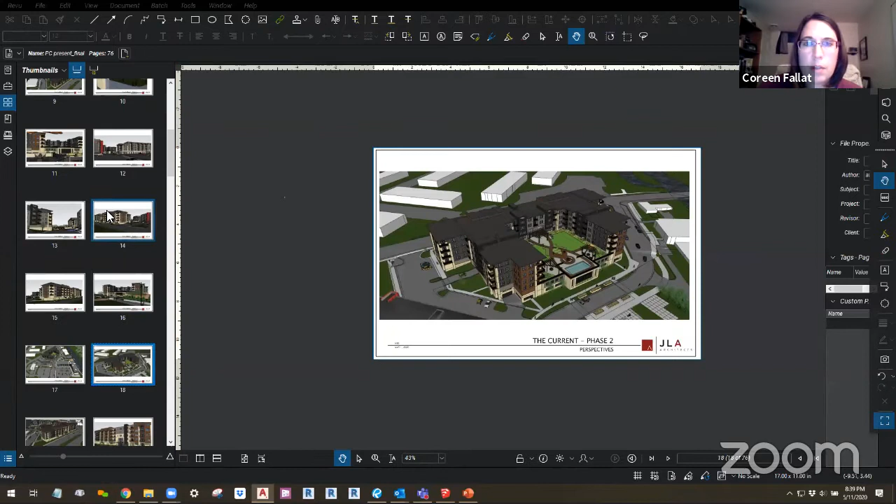Yeah, that would be great. Okay, can we have that be Plan Commission approval? Because that is a really big space, I feel like that might be a good one rather than just staff approval on that one. We sure can, and I don't think it would slow down construction whatsoever. And I know Steve likes coming back to see us.

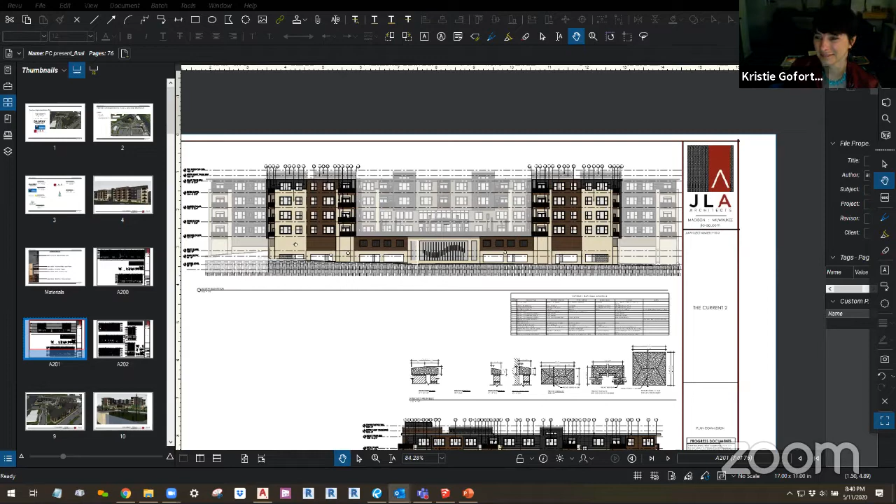So, we have a motion. We'll add a condition. Condition 22, that the street level screening wall come back to Plan Commission for final approval.

And I know how creative all of these gents are, so I'm sure they'll come up with something that's really snappy. Right, Steve? Absolutely.

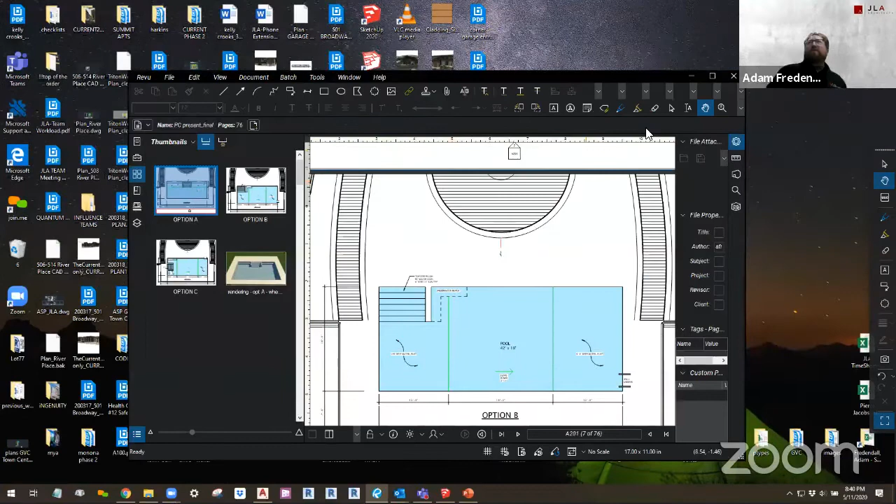On that vein, I really think you were incredibly creative on this from where we first saw it. It really pays to go back with your architect and Aaron and put your heads together. This is so much improved from the pre-hearing. I really applaud you for what you've done. Great, thank you, it was worth the wait.

I need a vote. All those approving the motion as written, aye. All those opposed? The motion carries.

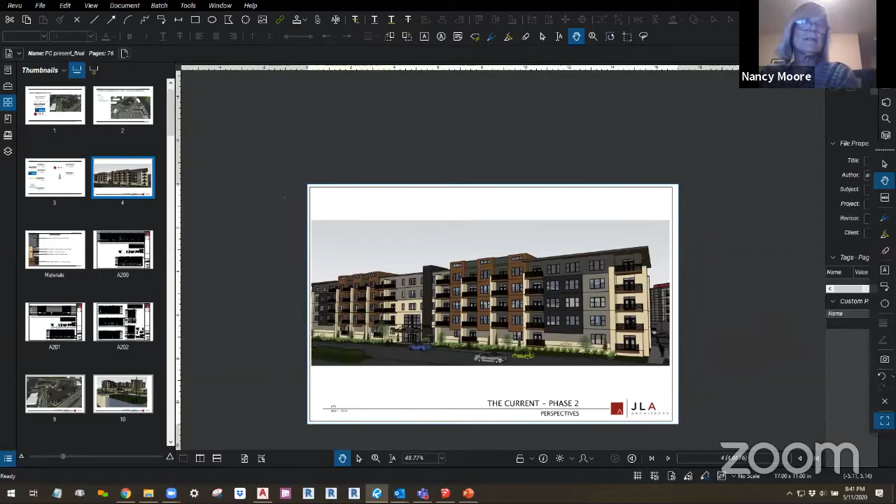Congratulations, gentlemen. Thank you very much. Thank you for spending another Monday evening with us. We missed you. Yeah, I miss you too. Hopefully we're in person for the screening wall presentation. Right, yeah man.

When's groundbreaking? As soon as we can. We're hoping our state review is June 10th, so we're hoping we're able to be on the ground that week. Well, thank you again. All right, everyone, have a great evening. You too, good luck everyone.

Okay, we're going to move on to reports of staff and commission members. 7A, staff report regarding status of development project proposals.

Thank you. So the one thing that I wanted to bring to the commission tonight was the planning and zoning procedures manual. You'll have found that included in your packet. This is a document that goes back quite a long way, I think the first iteration was from about 2014. This is something that both myself and Elisa, and really a big kudos to her for the design work that she did on this, have put in to really re-energize the document and bring it to what you see today.